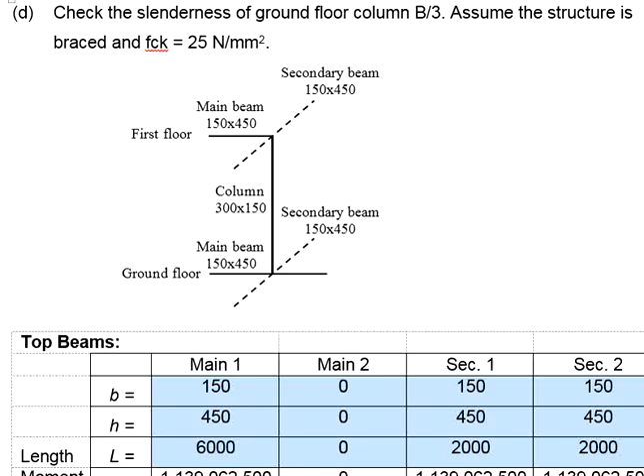Previously, we did an example to check the slenderness of a column, which is the ground floor column B3, assuming that the structure is braced. The column was found to be a short column. In these videos, we're going to deal with the same column, only that we assume that the structure is unbraced. The purpose is to demonstrate the differences in terms of the calculation steps, as well as the classifications of the column when the structure changes from braced to unbraced.

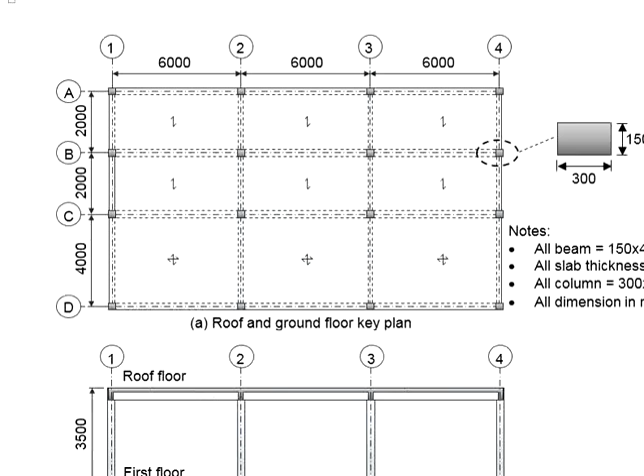Refer to the structural key plan, the elevations of the structure, the dimensions and the specifications given. This is the setup of the column. At the upper end, you have 3 beams connecting to the column, whereas at the lower end, you have 4 beams connecting to the column.

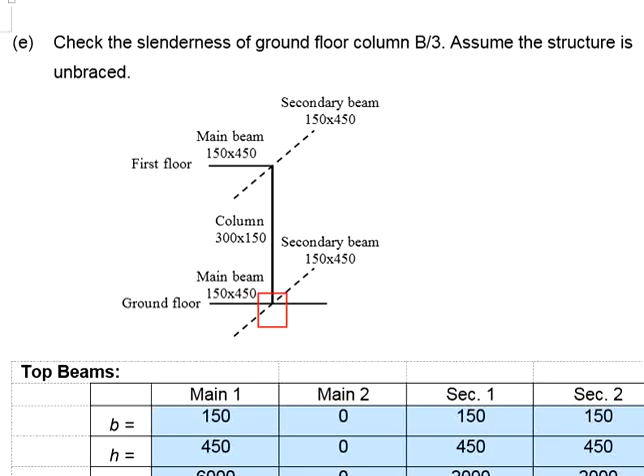The process to determine the slenderness of the column comprises 2 main parts. First is to determine the slenderness ratio. Second is to determine the slenderness limit. You will compare the slenderness ratio of the column against the slenderness limit. When the slenderness ratio is less than the slenderness limit, we can say that the column is a short column. Otherwise, the column is considered a slender column.

The calculation steps to determine the slenderness ratio as well as the slenderness limit vary slightly depending on the structure, whether it is braced or unbraced. In the previous example, we assumed the structure is braced. That means in the process of calculating the effective length, this equation shall be used. Now, the structure is considered unbraced. Instead of using these equations, this equation shall be used. This will give you another effective length, which ultimately will change the slenderness ratio.

Another major difference between the braced and unbraced structure lies with the slenderness limit. For typical braced structures, you may use either of these 3 equations, subject to the load arrangement. We have discussed the concept where different load arrangements will give you different responses of the column. As a result, the slenderness limit that you use differs. It depends on your design assumptions in terms of the load arrangement, as well as the conservativeness that you intend to have.

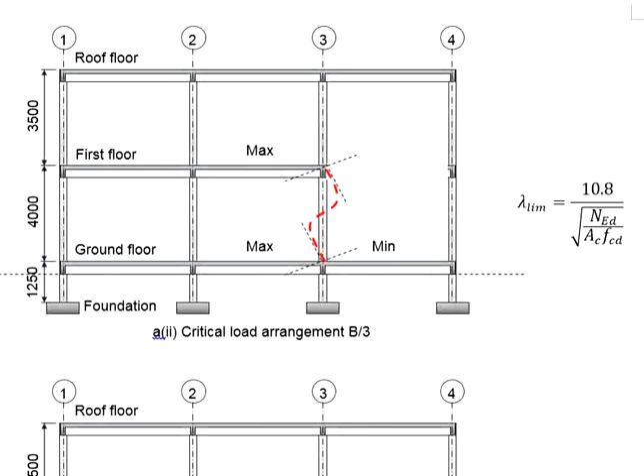However, dealing with the unbraced member, you will have to use this equation. These 2 equations are not applicable. Now, if you have difficulty understanding why this equation is applicable to the unbraced member, you may adopt the principles that we have discussed previously regarding the response of the column due to the deformations of the structure subjected to external load. For better understanding, you may refer to this diagram.

First, you need to understand the principle of braced and unbraced structure. The meaning of braced structure is you have a proper mechanism to resist the horizontal load. This can be due to the bracing or the shear walls. These members may be used to withstand the horizontal load, leading the structure, particularly the column, to only need to resist the axial loads without any horizontal deformations. As a result, both ends of the column will be in the same axis. There won't be any second order moment due to the P-delta effects.

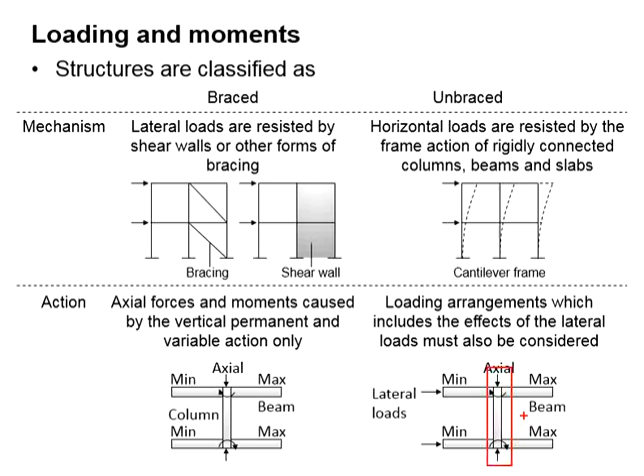However, when it comes to the unbraced structure, the entire frame behaves as cantilever members. Since you do not have any mechanism to withstand the horizontal load, the resistance to the horizontal load will be due to the cantilever actions of the column. The structure is likely to sway due to the horizontal load. As a result, the column will be subjected to axial load plus the second order moment due to the P-delta effects. Having this understood, let us come back to the response of the column here.

When the structure is unbraced, that means the entire frame is subjected to horizontal deformations. Due to these horizontal deformations, you will expect the joint to move horizontally. Taking this joint as an example, since we want to calculate this column, when the structure is subjected to the horizontal force, the joint moves. Assuming the joints of the members are monolithic, that means the column will be 90 degrees to the axis of the joint. At the same time, the lower end here, you assume without any movement, or you may assume that the horizontal movement of the lower end of the column is not as significant as the upper end.

When the joint here remains in the same position, 90 degrees to the axis of the joint, you will expect the column to behave something like this, as indicated by the red line here. You can draw an imaginary line connecting both ends of the column. Draw a line here, and you will see the response of the column something like this. Now this response will be identical to this.

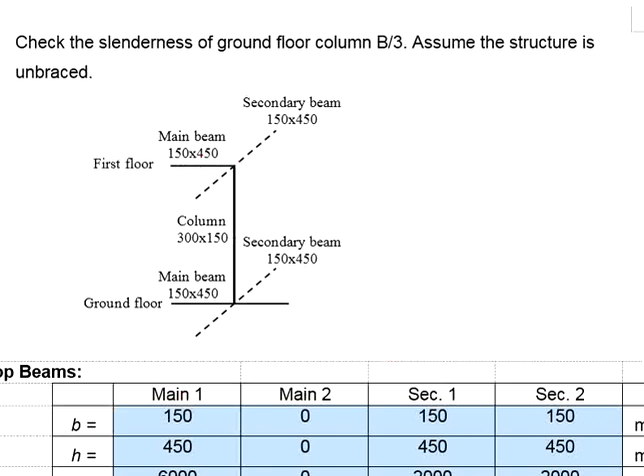Because of this response, that means for the slenderness limit, you will be using this equation. Theoretically, this and this will not happen in the unbraced structure, and therefore these two equations are not applicable to the unbraced structure. Having this understood, let us come back to this question.

We will start with determining the slenderness ratio of the column. First, we need to determine the effective length and then the radius of gyration. The effective length will be using these equations since it is an unbraced structure. You will need the k's.

K1 refers to the stiffness at N1, the upper end, and K2 refers to the stiffness at the lower end, N2. To calculate K here, you need to get the stiffness of the column as well as the stiffness of the beams. This K represents the relative stiffness of the column as compared to the beams. That means you need to get the I and L first in order to get the K, so that you get your L naught, and then the slenderness ratio.

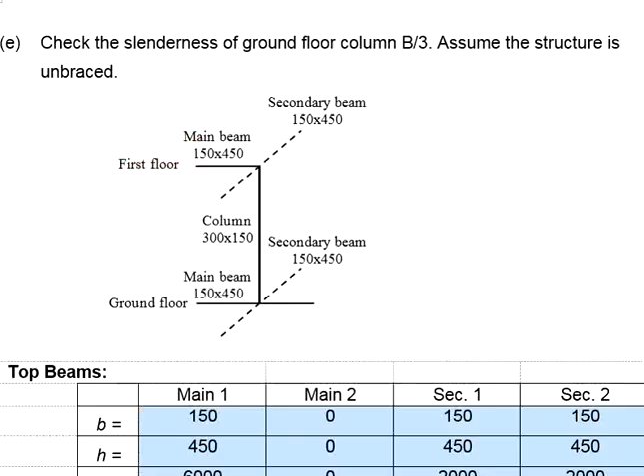We're going to go step by step. First, get the moment of inertia. The moment of inertia is taken as B H power 3 per 12. The beam size is 150 times 450. B times H power of 3 divided by 12 gives you the I, which is the moment of inertia.

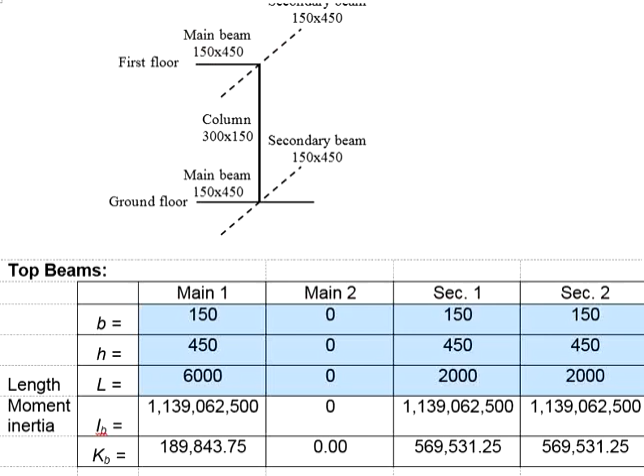In the major axis, you have only one beam from one side without any beam from the other side. That means for the top end of the column, there is no K here. In the secondary direction, you will have beams from both ends. Get the effective length also. This member is 6 meters, and these members are 2 meters and 2 meters.

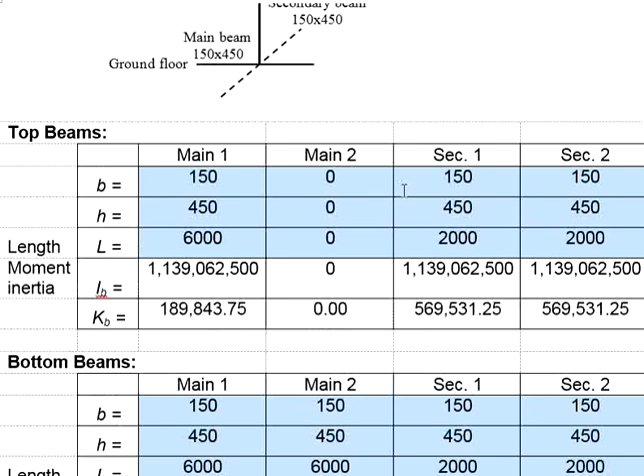Find the stiffness of each member. Getting the I divided by L, you get the K of the beam. You will do the same for the other members, and then repeat the same process for the joint at the lower end of the column. Up to here, the calculation steps shall be the same as the previous example, since the setup of the members are the same. Next, you will need to determine the properties of the column, the dimensions of the column.

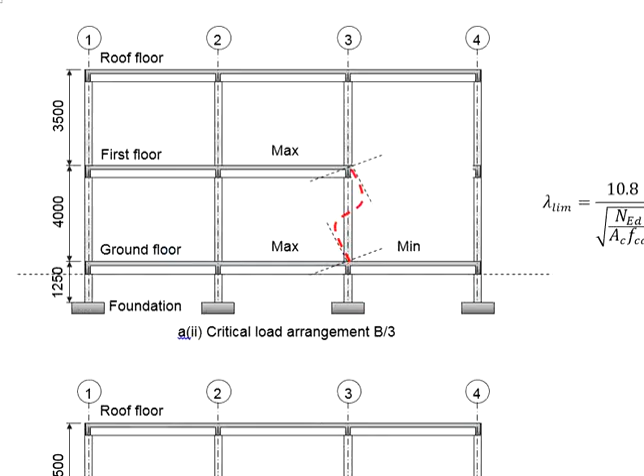The cross-sectional area will be 300 times 150, which is the size of the column, and then you get the sectional area. The story height is 4 meters. Same set of loading, axial load 49.12 kN. Now you assume that the structure is unbraced. Get the clear height of the column, which you may refer to the elevations of the structure. 4 meter story height minus the height of the beam gives you the clear height of 3.55.

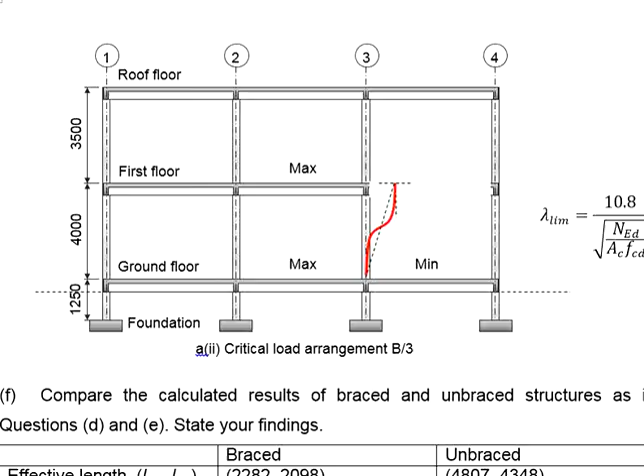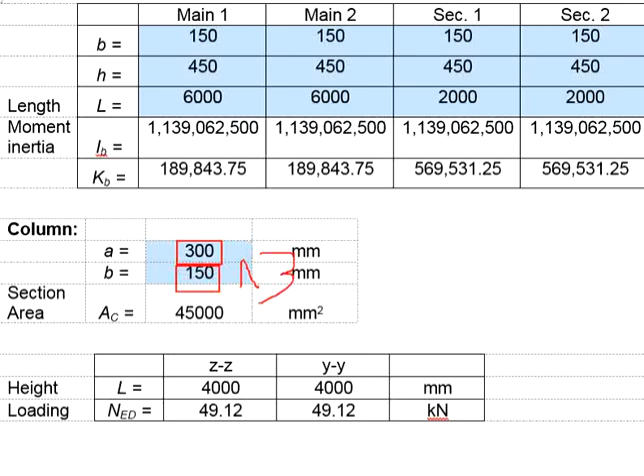And then get the moment of inertia. The equation is B H power 3 per 12. Since the column section is now a rectangular shape, the B and H swap depending on the axis you are calculating. Dealing with the major axis, the B will be the shorter one, and the H will be 300. To get the moment of inertia for the major axis, you will have B H power 3 divided by 12. If you are calculating the moment of inertia for the minor axis, it will again be B H power 3 divided by 12. This gives you a different moment of inertia.

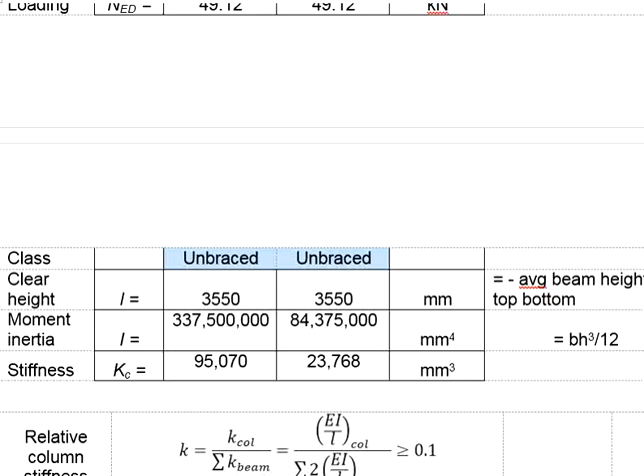And then calculate the stiffness, the moment of inertia divided by the clear height. Again, up to here, the properties of the column as well as the property of the beam, there is no difference between the braced and the unbraced structure. Due to the same set of stiffness for the column and the beam, your K1 and K2 for the major axis, as well as the K1 and K2 for the minor axis, will be the same.

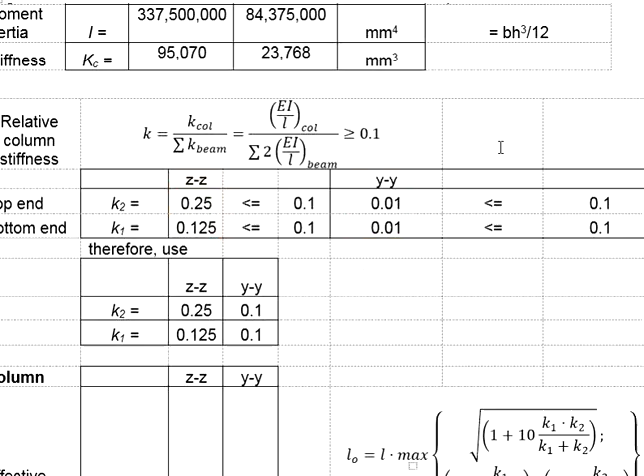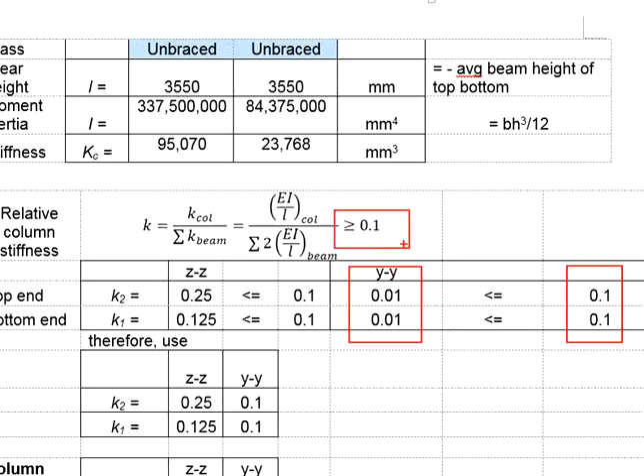Substitute the K from the beams and the K for the column into the equation. You get the K1 and K2 for the columns in the major and the minor axis. The K should be at least 0.1. When the calculated K1 and K2 is less than 0.1, you will use 0.1. This concludes the K1 and K2 for the major and the minor axis as indicated here.

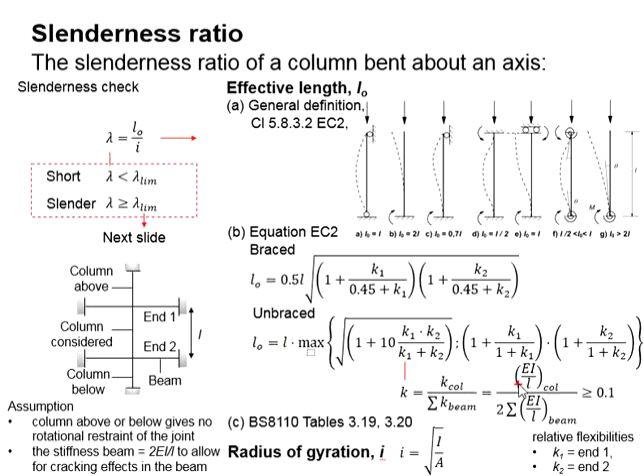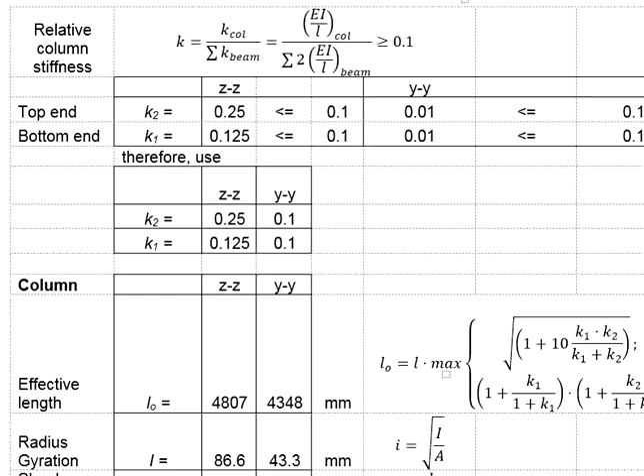Starting from here onward, the calculations differ between the braced and unbraced structure. Using the same set of K1 and K2 as per the braced structure, but now the equations used to determine the effective length differ. It is determined by either this or this, whichever gives a greater value. The L here represents the clear height, and the K1 and K2 are the ones calculated previously. Substitute the K1 and K2 as well as the L into the equations. You get your effective length higher than the story height.

The story height is 4 meters, but the calculated value for your effective length is more than 4 meters. Next, you calculate the radius of gyration. No differences observed, since this is purely a geometrical property of the column. Because the L0 here changes, your slenderness ratio changes. The slenderness ratio is calculated by dividing the effective length with the radius of gyration. And then you're going to compare with the slenderness limit.

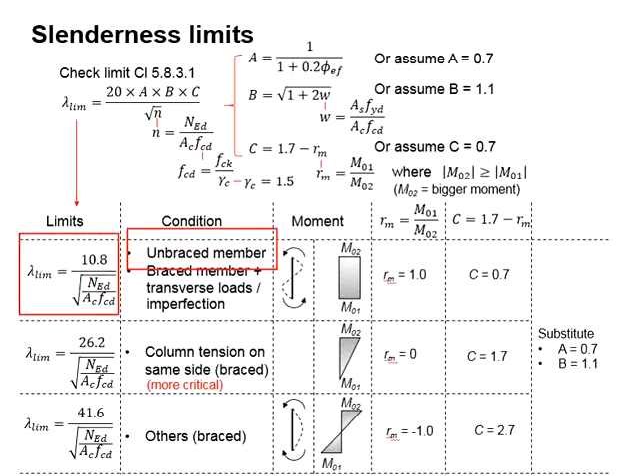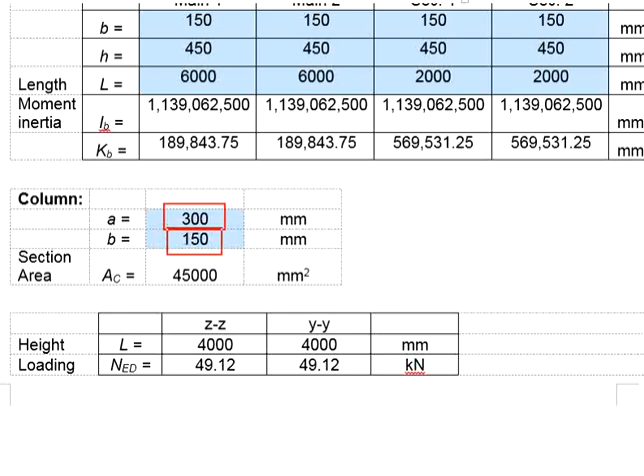For an unbraced structure, this equation is used. You have the NED, which is 49.12 kilonewton. You have the area of the column, which is calculated by multiplying the B and H of the column. Next, you need to calculate the FCD. FCD is calculated using this formula: 0.85 times FCK divided by the partial factor of safety of concrete. FCK is 25, and the partial factor of safety equals 1.5. You will have your FCD equal to 14.17.

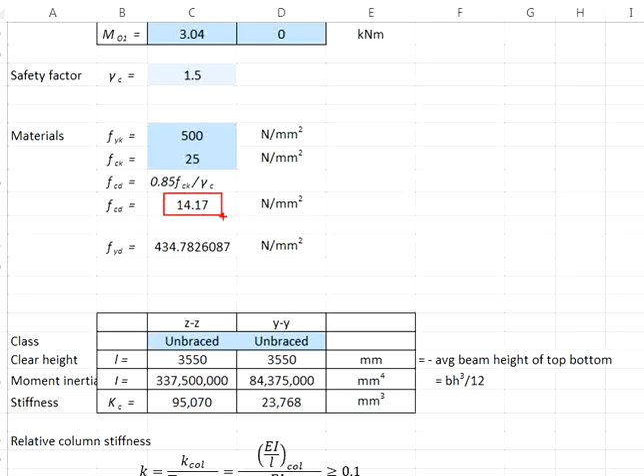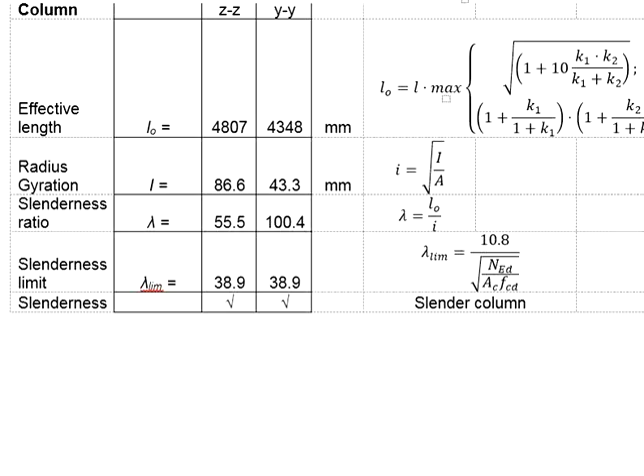Substitute into the equation and you get your slenderness limit of 38.9. You see now the slenderness ratio is greater than the slenderness limit. That means this column is no longer a short column; it is in fact a slender column.